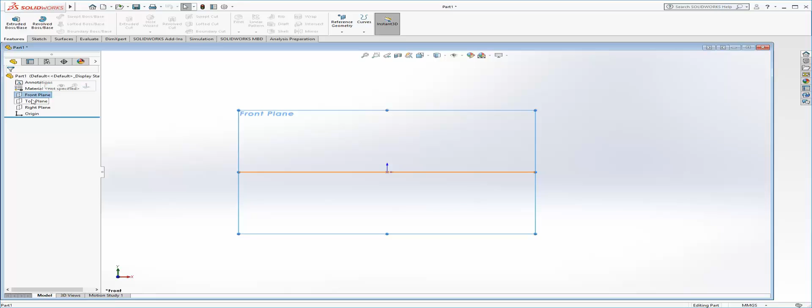I'm going to begin my sketch, and based on the model drawing, it does have a rectangle, which you can adjust to make sure that this starts on the origin. Mine was a little buggy.

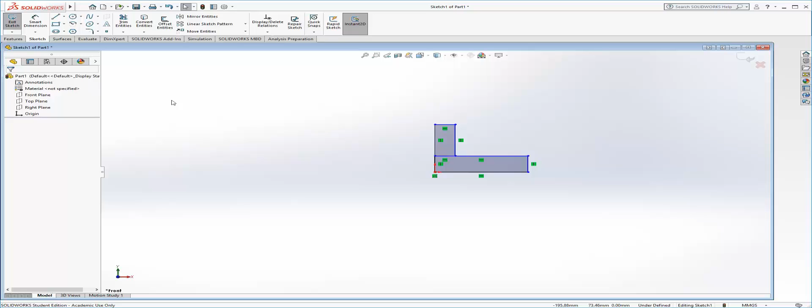Moving forward, we have another model that's going to continue. It's going to head upward, and that's going to be the outside model. I don't want to deal with any intersecting pieces here, so I'm most likely going to trim all of this in the end. I'll continue off and head to the right, down, to the right, up, and then finish my model off here.

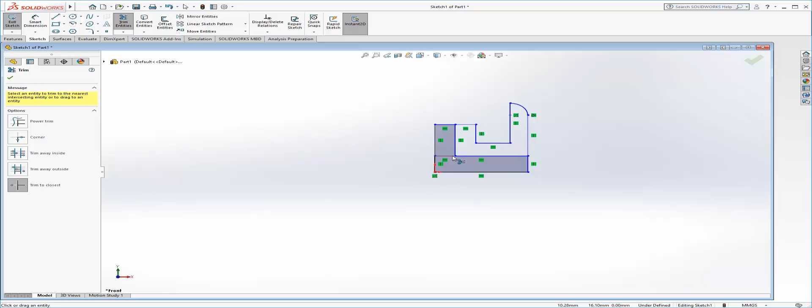I would like to trim, so I will trim this piece in here, and we'll trim everything just to kind of see how this goes. I want to add dimensions, so I have this extra outlier piece that doesn't need to be there.

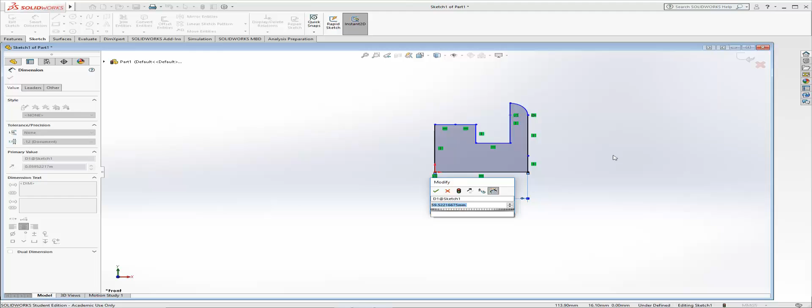So I got a couple of them, and specify my dimensions starting here. And it looks like I'm in inches. No, I'm in millimeters. So I'm going to go ahead and put 60 millimeters because that's what the dimensions were. Why it's showing 0.06 is beyond me. Let's try that again. It shows 60 here, so that's good for me.

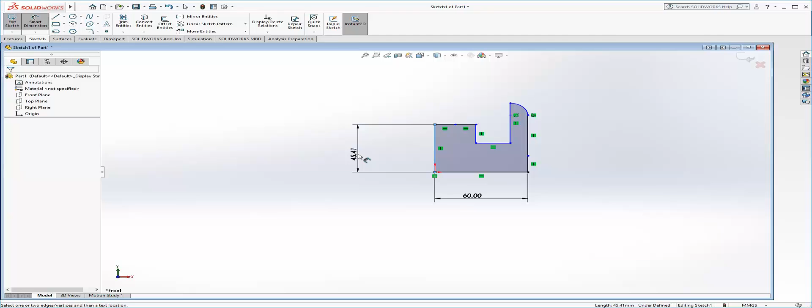I'm going to make sure that it is in MMGS. We'll come back to why it's showing those in just a second. Our vertical dimensions, we want to be in this position to be 30. There we go. Now everything's showing up the way it should.

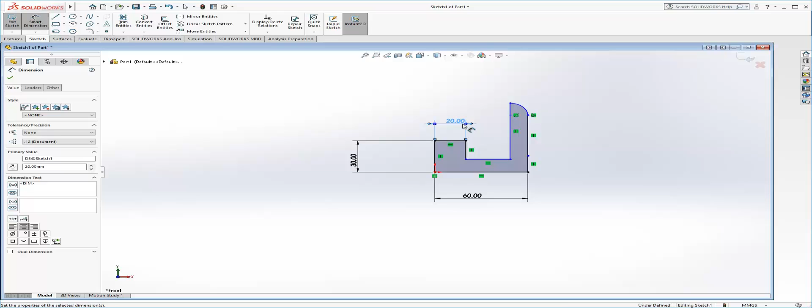This comes over across to be 20, but I'm going to trim that extra piece. This is just from drawing all of those rectangles. This should be 20 over. This one needs to be 10 down. 30 across. I look here, this is another 30 up.

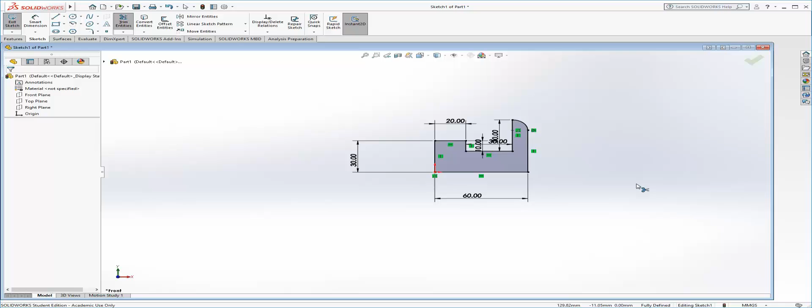And looks like everything is, at this point, for the most part, defined, except for this line that I've got coming out here. So we're going to trim that off too, because it doesn't need to exist. Notice I have a fully defined sketch, in which case I can extrude based on the top model.

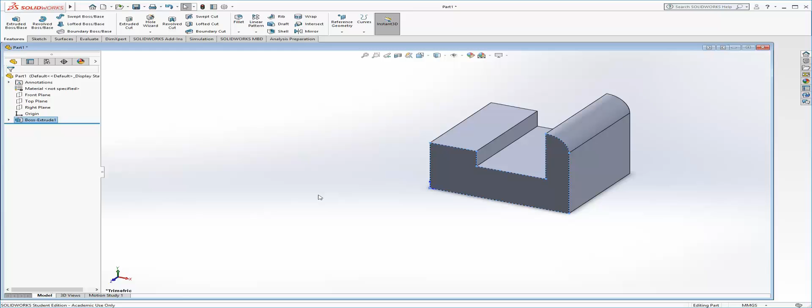It shows me from the bottom to the top that it extrudes a total of 50. So I'm going to go ahead and select 50, and I'll make sure that I reverse the direction to go that way. Looks good. So if I look from just this plane right here, and I go normal to it, this looks like that view without any of the lines in it.

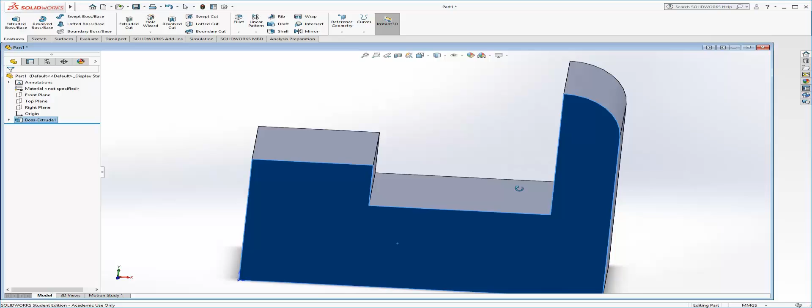Now I want to make a couple of adjustments to my drawing. So I'm going to take a look at the side profile view. The side profile in the top is going to give me a lot to work with. So the side profile is going to tell me that I have this ramp that's going to exist, but I have a lot of excess mass that I have to get rid of.

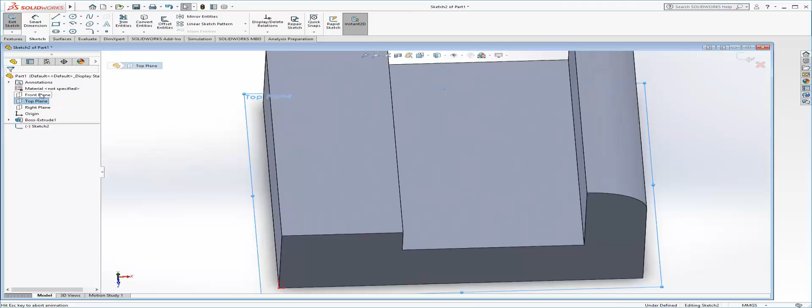So I'm going to start from the top plane, and I'm going to draw. Control 8 will bring me normal, and based on what the top view looks like, I can of course trim everything out. Notice that this is where I want to start based on my model. It starts here, and then it continues across.

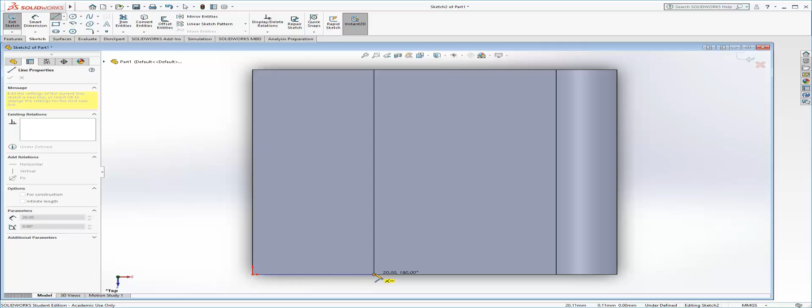I need to have my circle first, so let's try this one more time. I'm just going to go ahead and do this. Here we go. Have this go up. Have this go across. And of course have this go up.

Now I need to fix everything because I want to cut out all of the nonsense. This should be a quarter of a circle, so we'll make these horizontal. This should be a vertical relationship because, again, it's a quarter of a circle. I'm going to do the same thing down here. I'm going to make this horizontal. And, of course, these two should be vertical.

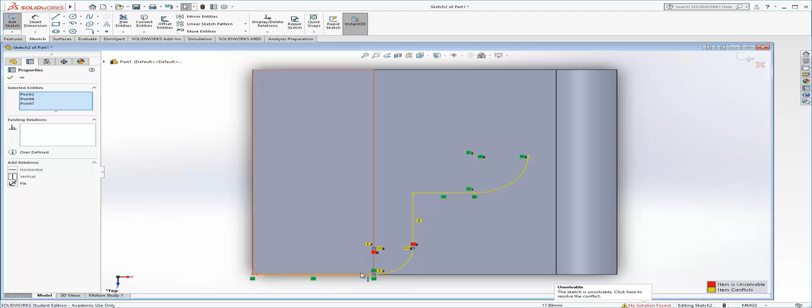Well, it says I don't need to do that, which is fine, so I will delete that relationship. And this is a construction line because it's not necessarily going to be part of our dimension. I can drag this over to this line, the silhouette edge, and I can make sure that it is coincident. I can also make sure, based on my model, that the correct dimensions are in place. So the radii for these must be 10 each.

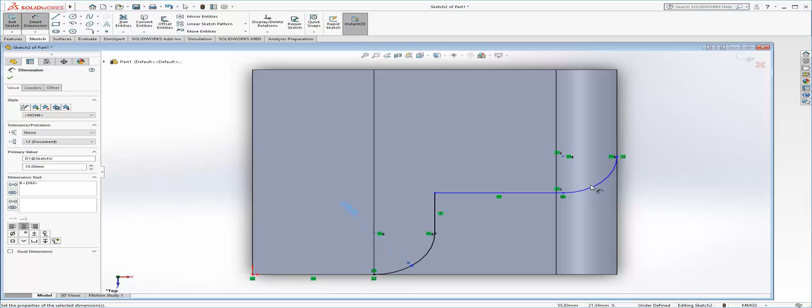And for this one, finally, I should know how far up this goes. This should be 20. And in order to finalize this piece, I need to close it off. So I'll go ahead and create my closed off feature, so it's fully defined, and I will then cut.

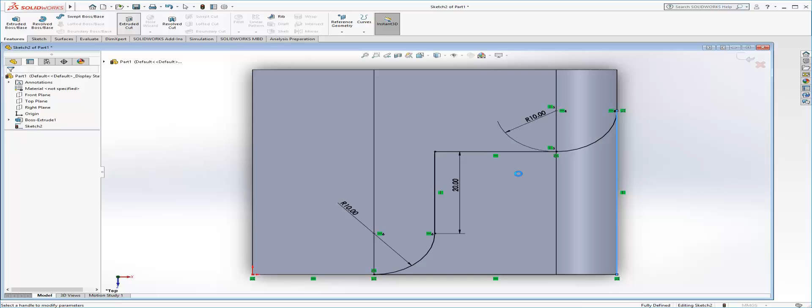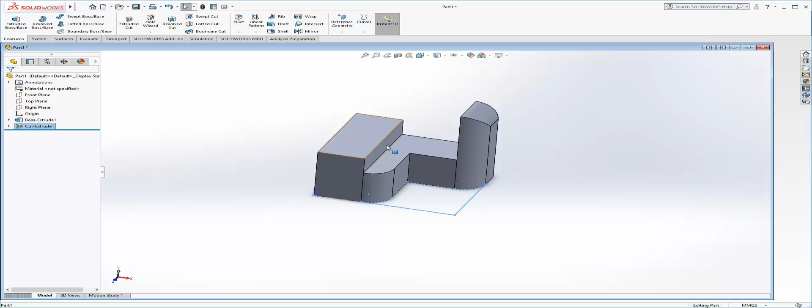Notice my entire piece is going to highlight, but it starts from the bottom, so I can reverse that direction to go through the top, and I want to cut everything. So that looks kind of like what I'm looking for right now. Now the thing is, even though that's what this should look like, I still have some issues, as you can see right here, that there's this little piece that needs to come off.

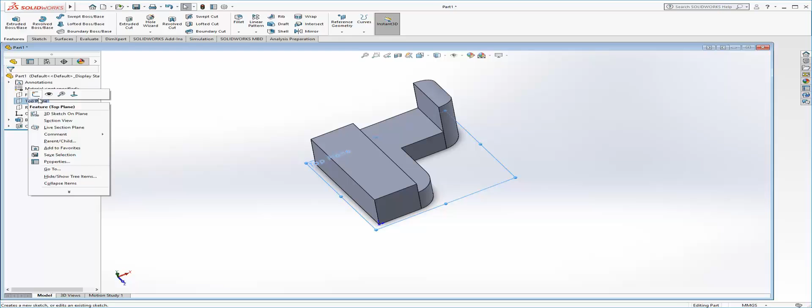Because notice that if you look in the front view, it shows that this model is going down to 10, but it's up to 20 right now. So I'm going to go ahead and on the top plane again, I'm going to create a sketch, and this time I'm going to cut down pretty much everything that exists there.

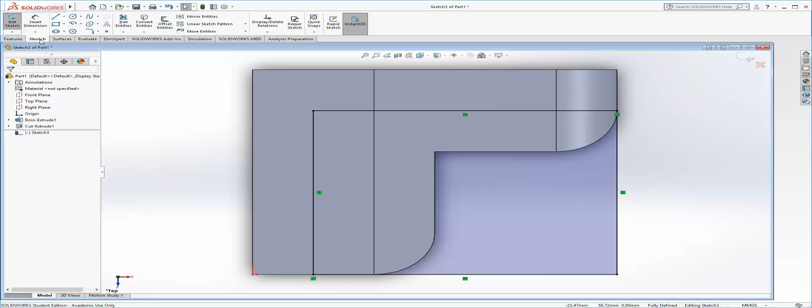So I'm going to start from the bottom corner here at the midpoint, and it's going to go all the way up here to this point here. And it should be fully defined. I go to extrude cut, and the problem is it's going to start at the base, which I don't want.

So I want to do an offset of 10. Notice that it moved up, but I want to cut everything in the other direction. And now this looks a little bit better.

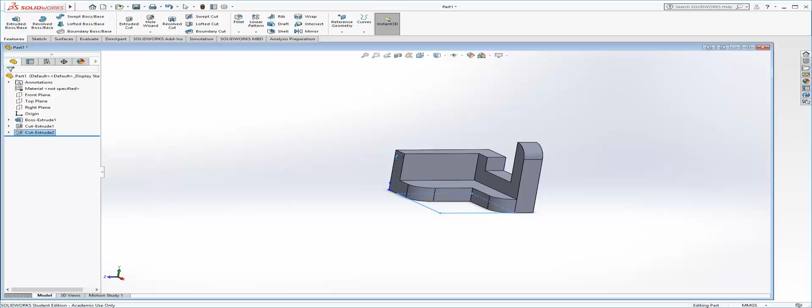The last piece that I have to add is that triangle cut on this plane. To make things simple, I want to cut this outside region, so I'm going to convert these entities. You can just draw them if you want to. And then, of course, complete the sketch.

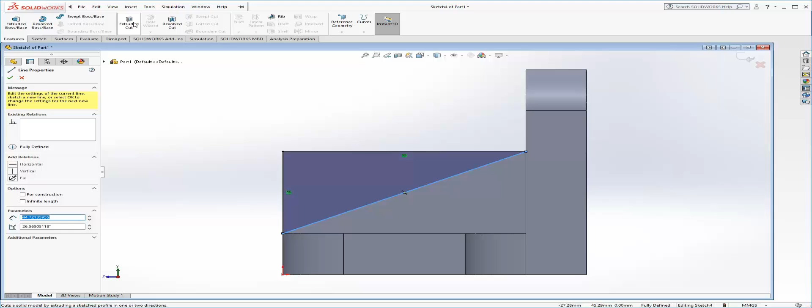Notice that it's fully defined. I can do an extrude cut, make sure it's going where I want, through all, select, and now my part is done.